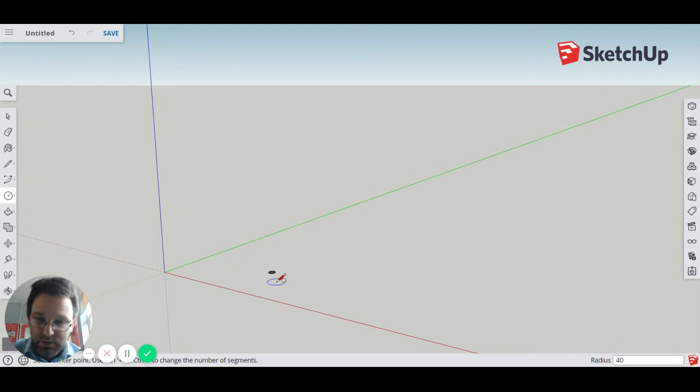We need it to have a radius of 40 millimeters. Now you might think that you've got to very carefully move the mouse in until you get to 40 millimeters. No, you don't. You can do the shortcut, which is to, without any hands on the mouse, you just type 40 and press enter. What that's done is it shrunk the circle down to a radius of 40 millimeters or a diameter of 80. What I'll now do is roll my mouse wheel into that shape.

If I want to now pan around and have a look at this circle, I click and hold the mouse wheel, the part in the middle of the mouse. And as you can see, I'm looking at this from the bottom. This is currently a totally flat shape. There's nothing there, it's like a piece of paper.

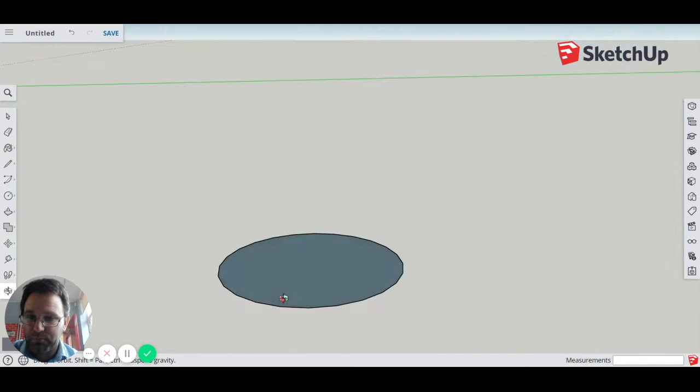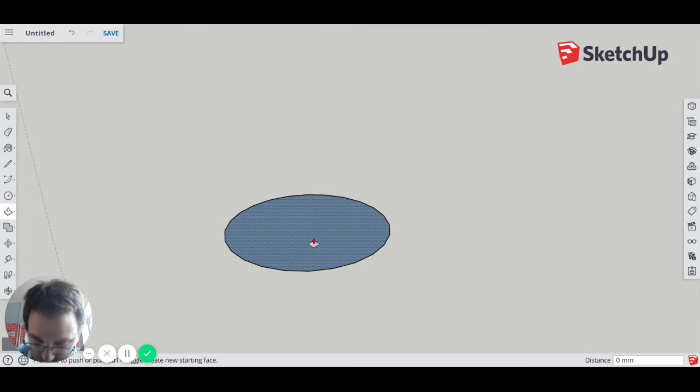So what I do now is I'm going to create material out of nothing, and that uses this tool here, the push-pull tool. So again, I get some options. We're going to use the push-pull tool. When I hover the push-pull tool over the surface here, you'll see it has this dotty pattern. That means that it's ready to be created. So I click and pull upwards.

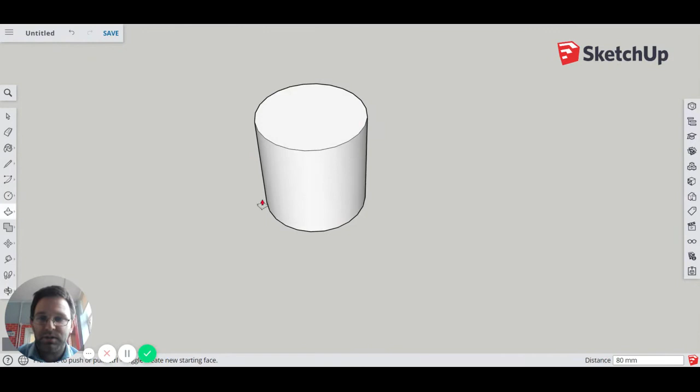I can let go, so I've got no hands on the mouse again. I want it to be 80 millimeters tall, so again I just type 80 and press enter, and you'll see that that changes in the bottom right hand corner. So now if I pan around, you'll see we have an 80 millimeter diameter and 80 millimeters tall cylinder.

Okay, so now the next thing to do is create the opening in this mug. Now we're going to use a slightly different tool to do that. We've got the push-pull tool selected at the moment, so I'm going to come over here and I'm going to use this one, the offset tool.

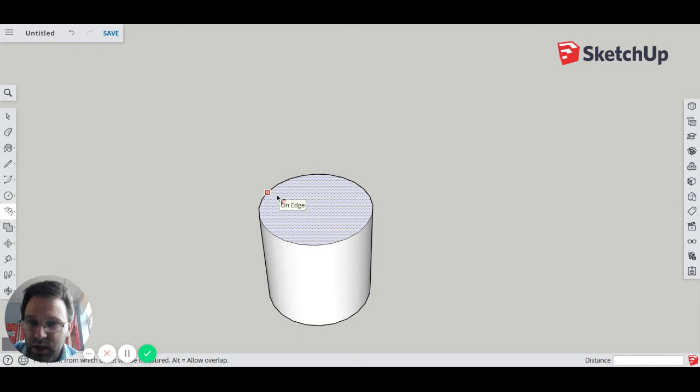Click that and hover my mouse over the top of the mug, and then you can see I've got this square, I think it's a red square, on the edge of the cylinder. What I'm going to do is click and pull that in, and then I want it to be 5 millimeters thick around the edge. So again, no hands on the mouse. All I do, type 5, press enter, and it makes that shape for me.

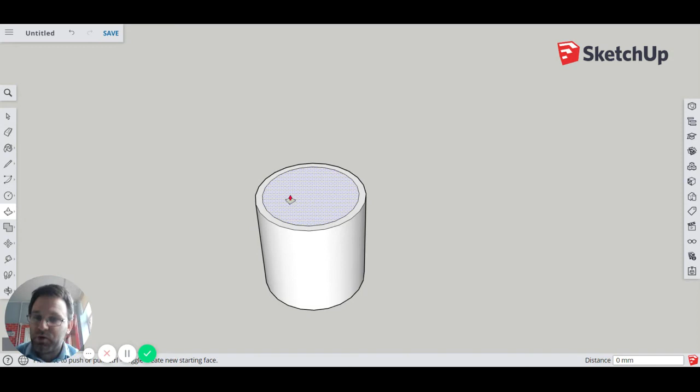Now, what I've got is a cylinder with a slightly smaller circle drawn on the top. I now need to remove some of that material. So I'm going to go back to my offset tool and select the push-pull tool. So before, when we created the cylinder, we sort of magically created material out of nothing. This time we're going to magically remove material so that we have nothing left afterwards.

So again, I get the dotty pattern on the surface, I click, I push downwards. This time I'm going to type in 75 and press enter, and then what that will do is remove the material from the mug. And if we look at the underneath, you can see it's still got the bottom attached.

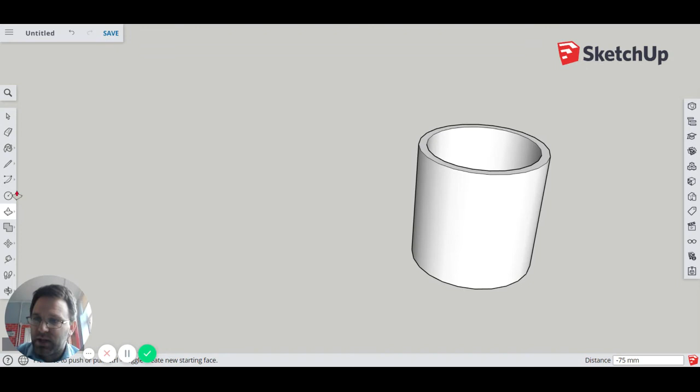Now, that bit's fairly straightforward. This bit gets a little bit more difficult. The first thing I'm going to do is I'm going to draw a shape, just a rectangle. It's going to be a vertical rectangle. To do that, you can see that SketchUp is telling me that I'm using the blue axis, so that's a good thing. On the blue axis, great.

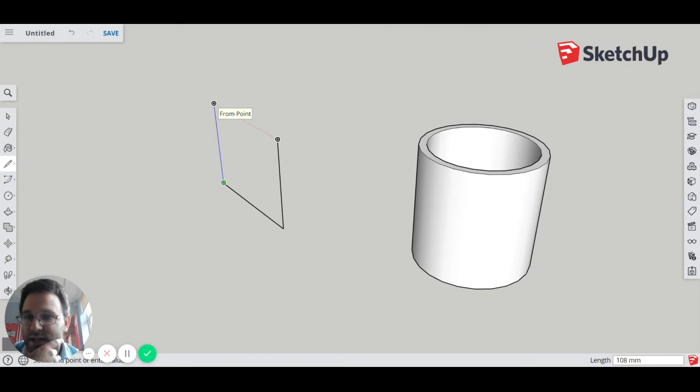Now what I'm going to do is go, I think this is the red axis, yeah, the red axis. I'm going to go across this way. I'm just drawing a quick rectangle, doesn't matter what size it is, so I'm not worried about sizes at the moment. Then I'm going to go up again on the blue axis. If I go over here, you can see that that's a black line, so that isn't on any of the axes. If I go over here, it's on the green, and if I go over here, it's still on the red, so I need it to be on the blue. You'll also see that SketchUp is showing me that I'm in line with the original line I drew, so that's a good thing. So I click, and I come back over here on the red axis, and that creates a face in there.

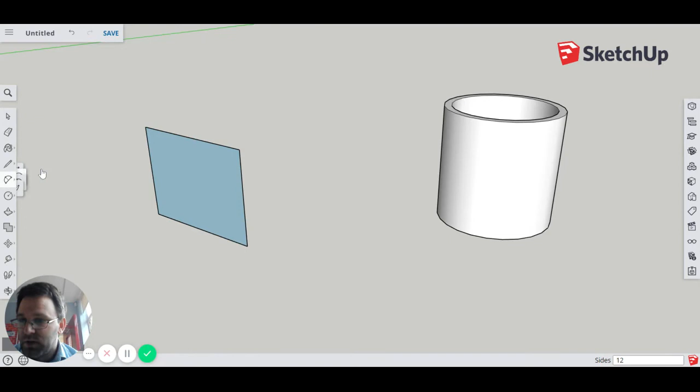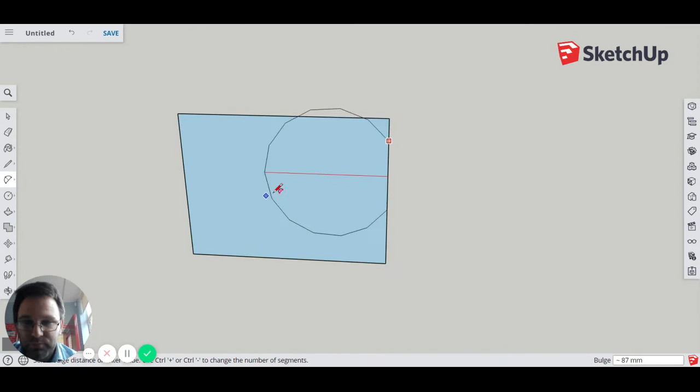Now, what we'll do is use one of the arcs, and we're going to use the 2-point arc, this one, okay? From here, we're going to go down, I think we'll go down about 60 millimeters. No, actually, we'll go 50 millimeters, like that. And then we'll pull outwards on the red axis. I'll just spin that round so we can see it a bit better. There we go. So I've drawn a line partially down there, and now I'm going to go out with a bulge of about 40 millimeters. So I type in 40, and I get this sort of odd partial circle.

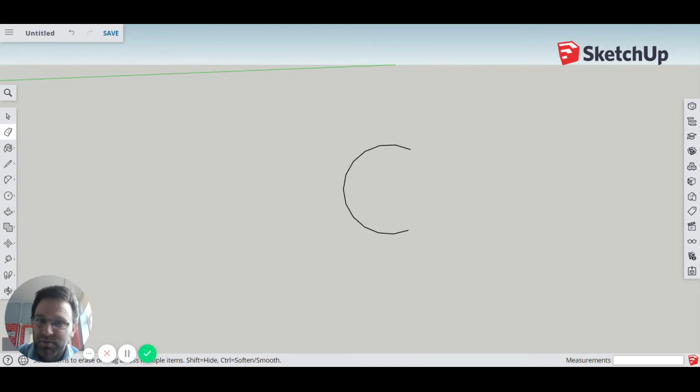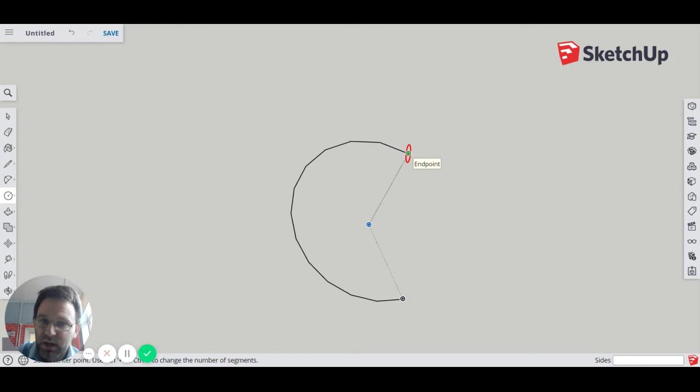I then use the eraser tool up here to get rid of the excess stuff. So we just use that shape there to give us something to draw on. It sometimes makes it much more understandable if you draw onto just a rectangle. I'm now going to use the circle tool, and I'm going to hover over this point here, the end of this sort of C shape that we've developed. Now I'm going to use the arrow keys, because at the moment the circle is aligned with the blue axis. I want it to be aligned with the red axis. So if I hit the right arrow, it becomes aligned with the red axis.

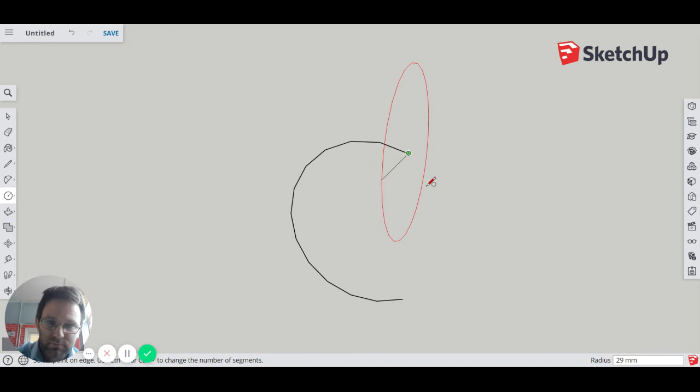I click and I pull outwards, and I'm going to give this a radius of about 6 millimeters, I think. So I type in 6, press enter. Oops. Stuck there. 6, enter. There we go. And you can see now what I've got here. I've got an odd sort of shape, a C-shaped line with a circle on the end of it.

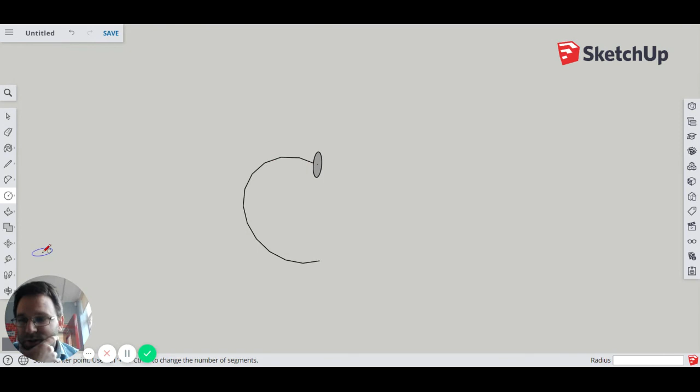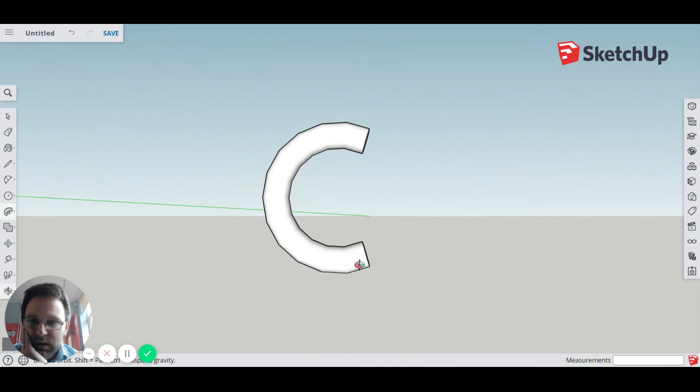What we're going to do now is use a new tool. So we go back to push pull, and we select this one. It's called follow me. What I'm going to do now is hover over the end of the face of the circle we've just drawn. Click that, and then I'll pull it along the C-shaped line like that. Till I get to there, then I'm going to click. Now you can see what that's produced. Almost like a what's it shape, yeah? So it's a C shape, but the circle is all the way along the shape itself. That will form the handle.

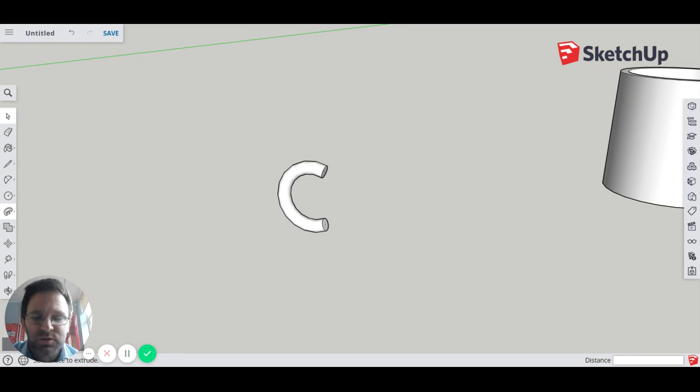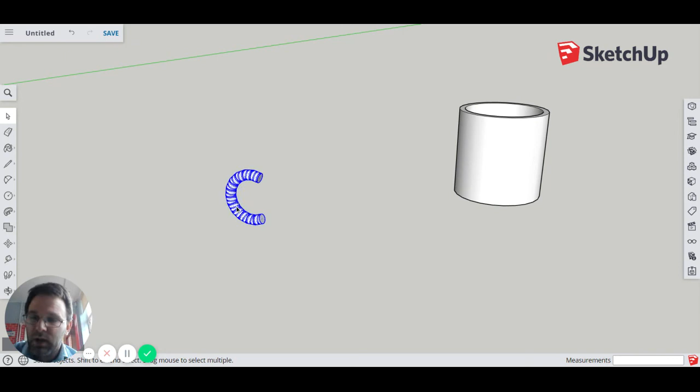Now, to move that over, this is where SketchUp is a little bit fiddly, becomes a little bit sort of irritating to use. You can get disorientated quite easily. First thing I'm going to do is I'm going to triple click on the cylinder. So click, click, click, and it selects all of it. What I then do is right click and select make group. So that's all joined together. You can't lose bits of that now. I'm going to do the same over here. I'm going to triple click, and I'm going to right click and make group. So now I've got 2 different parts which I need to join together.

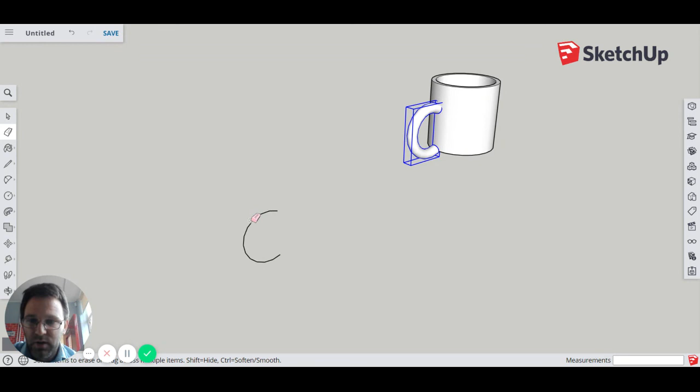To do that, I will use the move tool. And this is where SketchUp becomes a bit fiddly. So I'm going to move this over to about there into a roughly correct position. I can now get rid of the C shape. There we go. And this obviously is not perfect, so we're going to need to do some more sort of fiddly moving. Something like this looks better. Now I might move this one just over, but I don't want that to clip through there, so that's about right. And that's about right.

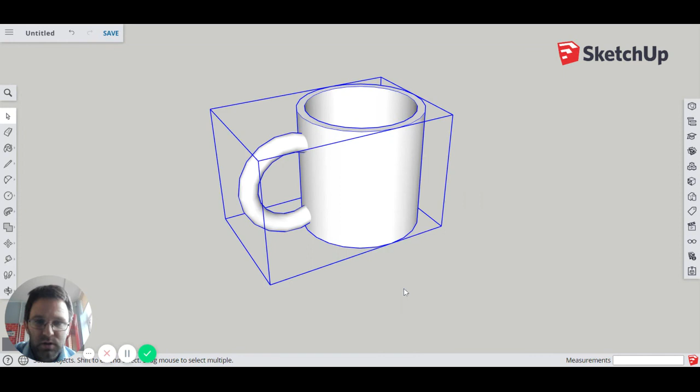It needs to go this way slightly. Looks good. Have I clipped through? No, I haven't. Is that central? Yes, it is. So there is our completed mug. Now I'm going to select all of them like that, and I'm going to make a group like that. So the whole thing is now locked together, and you can't lose a part of the mug.

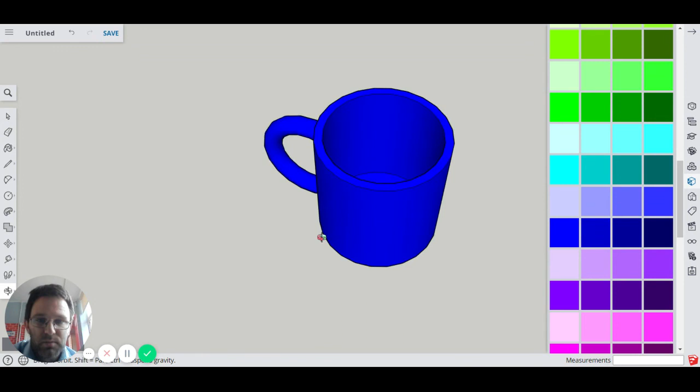Obviously, this is a white mug, so we're going to go to our materials section, and we're going to go browse, and we're going to go to colours. And you can turn this mug into whatever colour you like. Let's go for a nice blue mug. There we go. All right then. So close that down. You can change your file name up here and click save. I'm just going to leave it like that because this is a nice simple model.

But there we go. There's another computer-aided design model introduction. Do have a go at SketchUp.com.